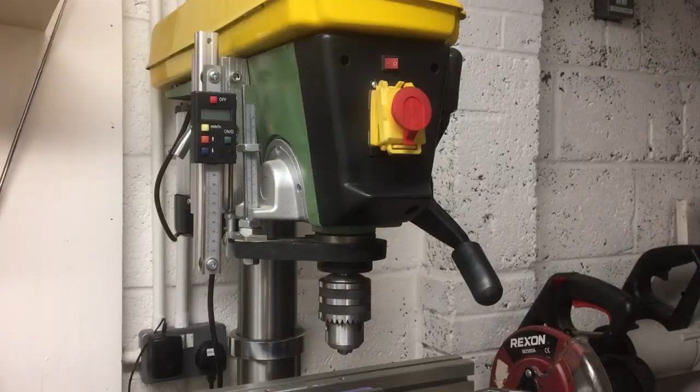Let me introduce you to my Warco drill press. It's got a 650 watt motor, Morse taper 2 spindle, and a travel on the quill of about 80mm. Under this cover we've got two belts configured with an idler to give a 16 speed range. And we've got the usual rack and pinion adjustment for the table height. So all in all, a very powerful, robust, sturdy drill, ideal for hobbyists.

But could it be improved?

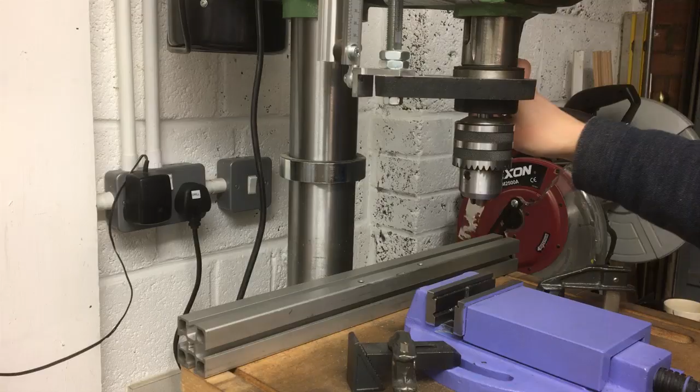Well, in common with all drill presses of this style, changing the belts can be a bit of a pain. In this particular model I've got to go up the ladders, undo the screw on the cover, then adjust all the belts, change the speed, tension it all back up again, and then I've got my new speed. And when I want to change the speed again, I've got to repeat it.

But could it be improved?

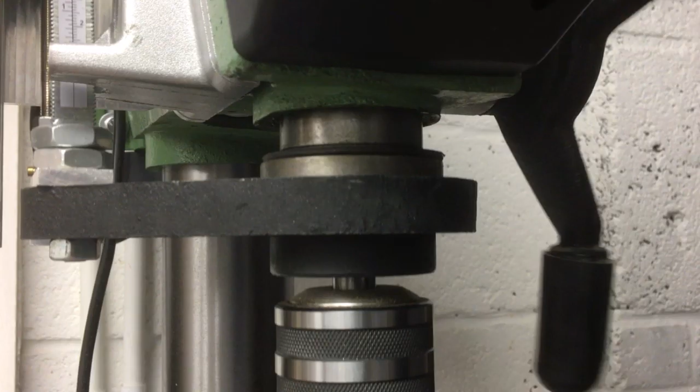Also, like all drill presses of this style, there's a little bit of free play in the quill. It can be tightened up with this little set screw that runs in the groove, but could it be improved?

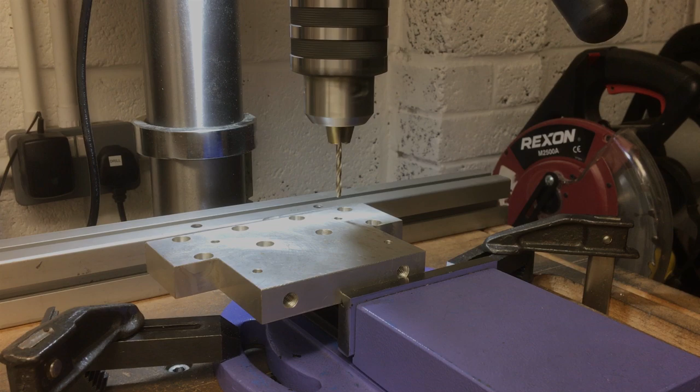When you move the table up and down, you lose your reference to your hole and you've got to get back on the centre again. Particularly apparent if you drill a pilot hole and then put a large clearance hole in, or if you want to drop it down even further to tap a hole.

But could it be improved? Let's find out.

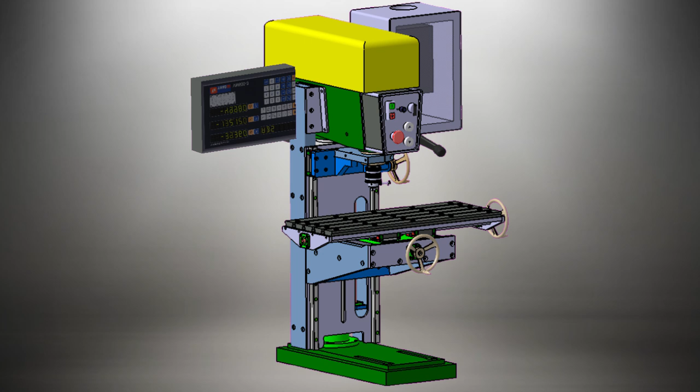Okay, so that's the basic idea. There'll be a steady system on here that will run on rails that holds the quill in place at the bottom end, and then essentially an XY table like you'd find on a knee mill.

Oh wow, so you're building a milling machine then? No, it's not a milling machine. But it's got a milling style table? Yeah, I know. It's not a milling machine though. This is going to be a drilling machine. So what that will enable me to do is drill very accurate hole patterns using the table, or bore holes, counter bores, and then there'll be a slow speed feature for tapping threads. So that's the idea, it's a precision drilling machine. You sure you can't mill with this machine? It's not a milling machine.

Well, for a start, you've got the wrong bearings in here. These bearings are just to take the axial load, not any radial loads that you get from milling. And the second thing is, when you're milling, because there's a helix there will be a tendency to pull whatever you've got in here, in this case the chuck, out of the taper because there's no drawbar holding it in. So it's a precision drilling machine, not a milling machine.

Although, if we took the spindle out, made a new spindle with a drawbar, automatic tool changer, and the right bearings... No, this is a precision drilling machine project. Let's just get that done and get it finished. But you could mill with it. Leave it.

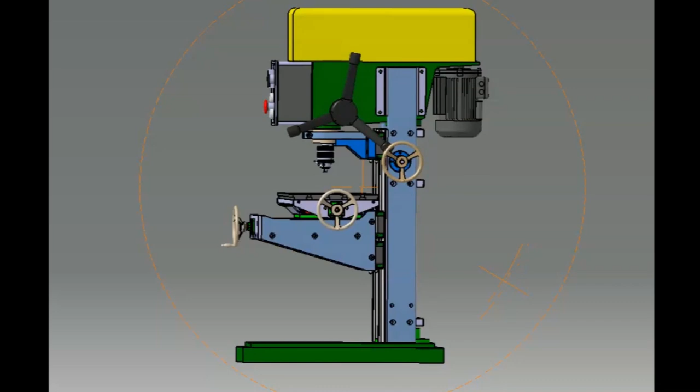Okay, so let's have a more detailed look at this machine. You can see an XY table towards the bottom there. It runs on those linear rails, and that's moved up and down by the gold crank handle on the right. Then we've got the quill itself, you're going to see move up and down, on those linear rails in the usual way. There's the black 3-pronged handle that moves that up and down. It's just supported at the back on those linear rails. I haven't drawn all the quills, so there's a little bit of a gap there, but hopefully it gives you the idea.

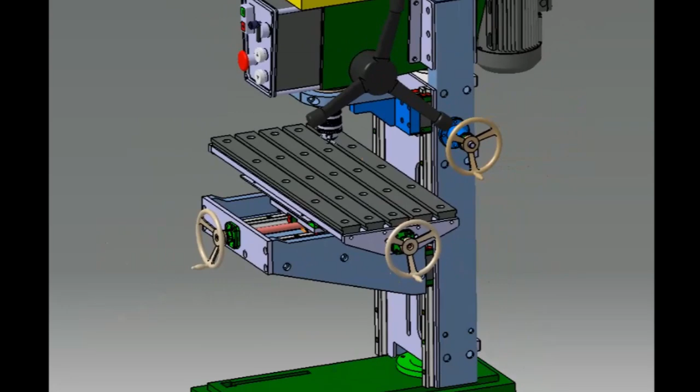Okay, we'll just zoom out a little bit and spin it around so you get a better view of the table. The table itself is a fairly traditional XY table. I haven't drawn the way covers on there, but you can see some of the shields and guards getting ready to take those bellows type covers. Otherwise it's fairly traditional. You've got two handles to move it in the X and Y direction. The other handle you can see on the top right on that tall beam is the handle to move it up and down. I'll show you that mechanism in a minute, but this is essentially the table moving up and down on those linear rails, a little bit like a knee on a traditional milling machine.

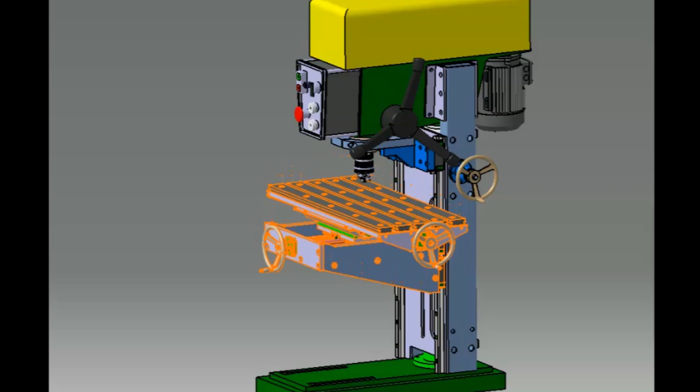And then if we spin it around to the back and zoom in so you can see the mechanism. That handle on the blue column, you can see there's a drive shaft that goes all the way through, and then the two purple parts are bevel gears. They're 45-degree bevels, so they take that rotary motion and turn it onto that ball screw, which is the salmon coloured part, and that turns the ball nut up and down. The ball nut's connected via a small arm onto that table.

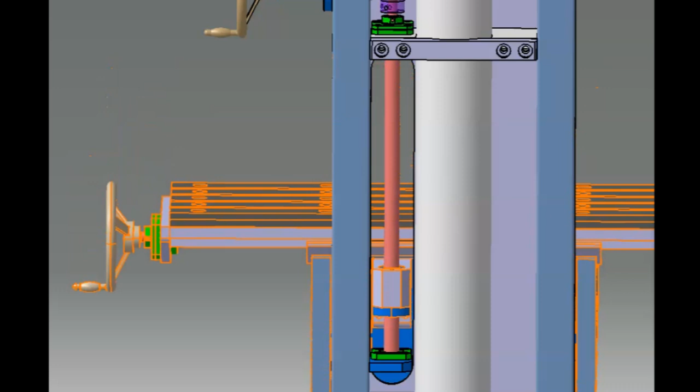A little bit like you would find on a normal or benchtop milling machine. That moves up and down like that in that slot.

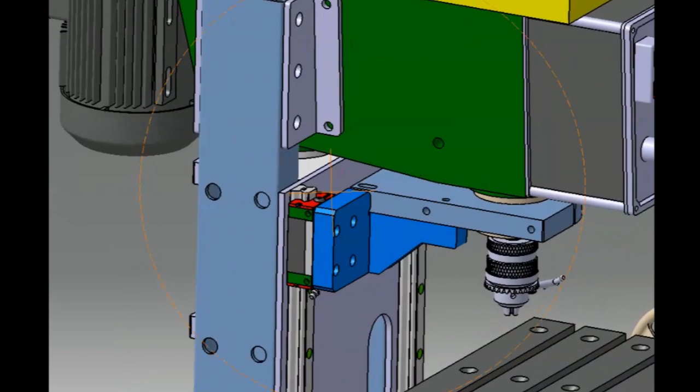Also, while we're around the back of the machine, you can see the main tube there, that white column, that's about an 80mm main column. Then there are 3 clamps that clamp these side rails onto that, kind of blue side rails that go onto that. And they then take a plate on the front, which will be a precision ground plate, and then that takes those linear rails, which are 20mm rails.

Now we're onto the front control panel, so I'll make this control panel from scratch. You can see there's an on-off button and the speed control, then forward and reverse, and bottom left is emergency stop, and then the 2 arrows for up and down jogging.

Here you see I've taken that front panel off, and you can see how I'm going to make it. There'll be 4 tubes, one at each corner, and each of those tubes will have a slot machined in it to take a panel.

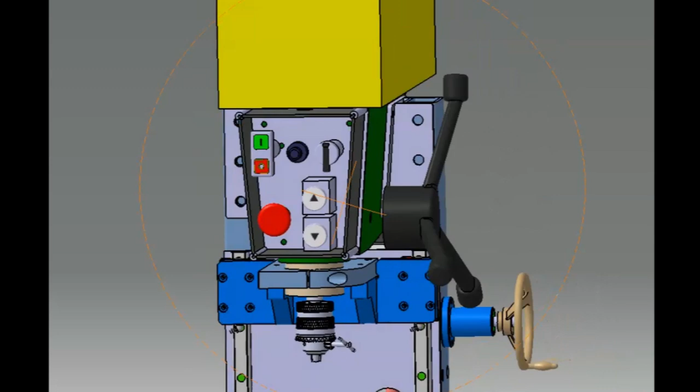And then in the panel at the rear that bolts onto the machine itself, there'll be grooves that those panels sit in, and the same thing on the reverse side of the outer panel. You'll probably see when we get around to making that part, but that'll just be made in sections and then slid together and bolted up tight.

Okay, so let's spin it around a little bit more so you can have a look underneath, at the table, the XY table, and then you can see the Z locking out mechanism.

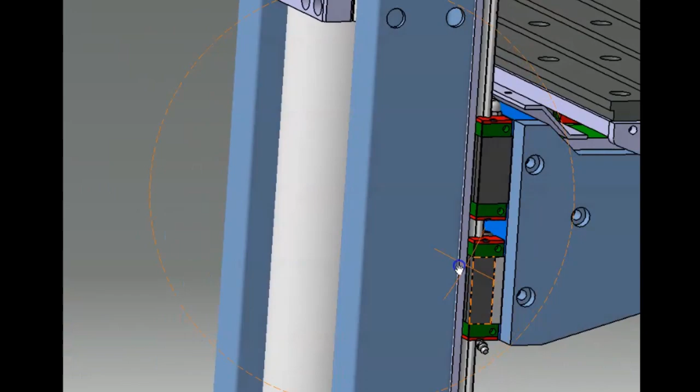That's the purple part, sometimes called a Bristol clamp, but it's an indexable clamp that you move the handle round and ratchet it round. That locks onto, because you don't want to put pressure on those linear rails directly, it locks up against a kind of T-nut, the green one there. You can see it slides in that slot, and it locks that cylinder in place, the white cylinder, so the blue part can't go down any further, but they're not directly connected, if that makes sense.

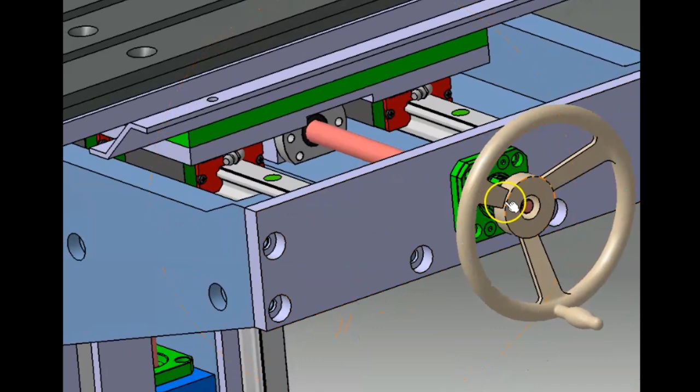Then you can see the XY table just makes use of standard HIWIN 20mm rails and carriages, and it moves in the X and Y directions. There's no covers on here, but you can see the drive handle there. I think that's where I'm going to lock it out, on the drive handle end, to stop it moving, sort of simulating a stepper locking it out.

There you can see where the way covers would go, I haven't drawn those yet. The bellows on that side, and then there'll be another set at the rear that will go from rearward, be folded up, and then go upwards towards the quill, a bit like you'd see on a regular milling machine, just to keep the worst of the swarf out from going down onto those rails.

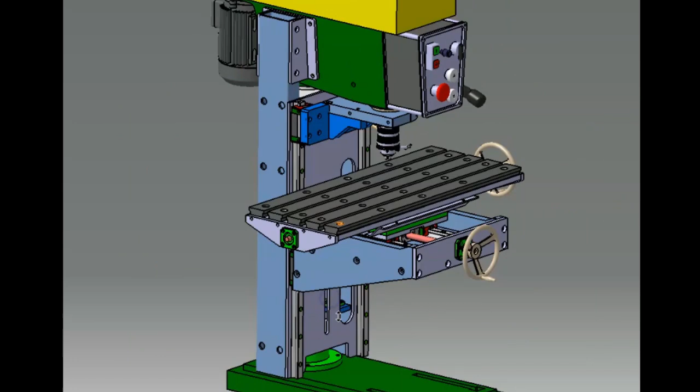So that will fill in that whole area there, and also cover for when the quill goes up and down. The last thing to mention is that we've got standard T-slots on the top there for bolting the vice down and fixtures and so on.

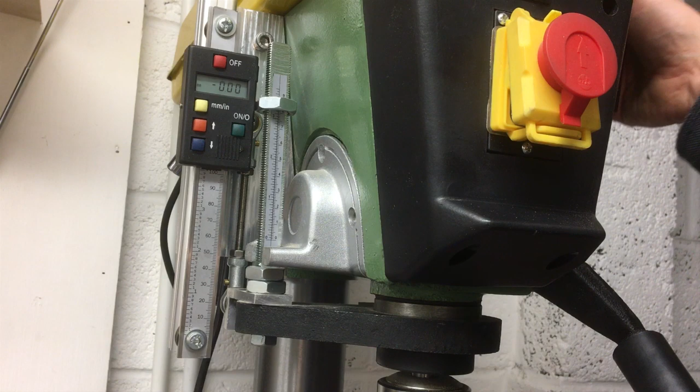So I've had this drill press quite a few years now. One of the first jobs I did when I got it was to add this digital readout on the quill. It's really handy if you just want to put a counter bore to a precise depth. It's a pretty fast update, works really well.

So all I did is made another bracket that runs off the back of this existing depth stop, goes to this multi-axis rose joint here, another one at the other end, and that pulls the read head up and down. By using those multi-axis joints top and bottom, it allows for a very slight bit of misalignment without putting pressure on the head.

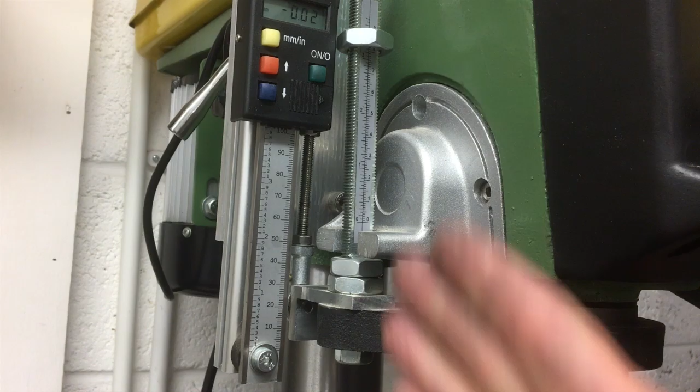I bought this from a company called Machine DRO based in the UK. They sell a lot of nice high quality gear. This has got a really nice smooth quick update and it works really well.

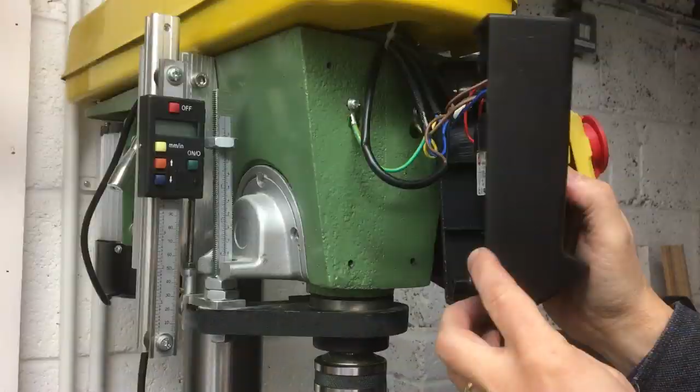Okay, so if we take the front control panel off, inside we've got a no volt release switch here. If the power fails, it turns this unit off, saving it from starting accidentally.

At the top we've got the rocker switch that controls the light. We've got a couple of ground points there, so there's 4 cables in total. One will be the mains coming in, one will be going off to the safety switch, because in the lid up here, if you open it to change the belts, it cuts the power.

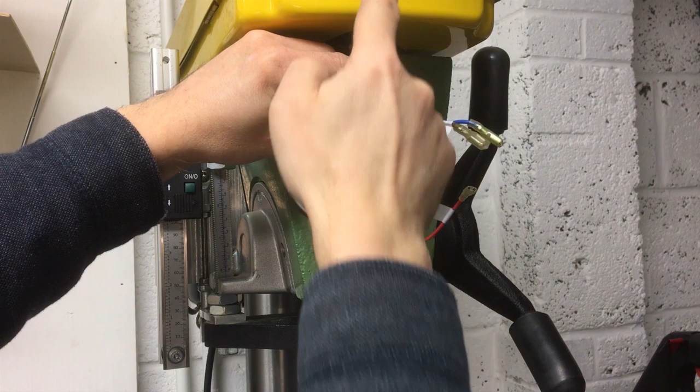Now we've got the cover off, I've labelled up all the cables here. So we've got 4 cables in total. This first one comes from the mains. This one is to the motor. This one here is for the light, you can see it's a smaller cable. And this one is the lockout switch. There's a safety interlock on the cover, so if you open it to change the belts, the motor won't run.

Looking at it a little more closely, we've got our main cable coming down there, onto the mains, onto this one, which is on pin 1. If we look at this little box, this is the back of the safety switch. So 1 comes in here. If you press the switch to run the motor, that joins it across to terminal 2, and 2 is up here.

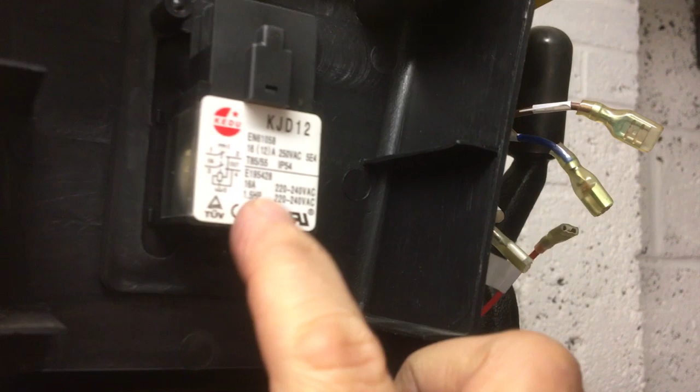2 is up here, and that goes to the lockout, the safety lockout on the cover. Assuming the cover is closed, that comes back on pin 4, down at the bottom here. So it's gone all the way around 1, jumped across there, gone up to the lockout, back into 4.

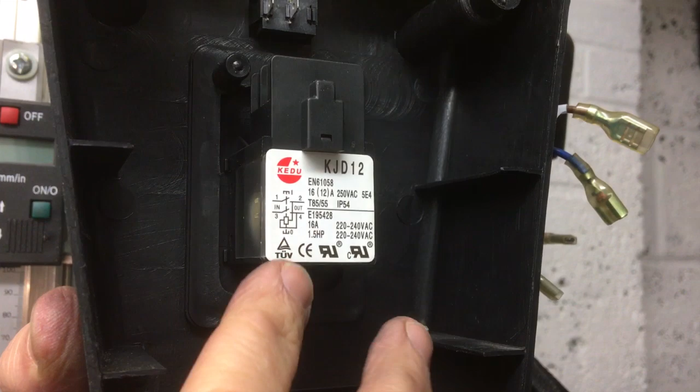That does 2 jobs. One, it energises the coil, and you might just be able to see there's a relay coil in there. That's the interlock system, so as long as there's power going to the system it will hold the switch in, and if the power cuts, it switches this off so it doesn't start inadvertently when the power goes back on.

The other function of pin 4 is when that's joined across there, it feeds power into pin 3, and pin 3 is here, and that goes off to the motor. This is just a single phase motor at the moment. Comes back from that motor down this cable and into the neutral and back into the mains.

Now there's 2 earth leads on there, one's from the mains and then there's another earth here, just making sure the basic chassis is earthed as well.

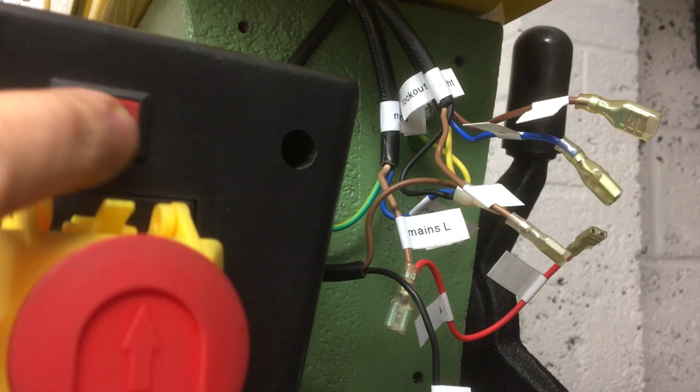So essentially that's it. The only other function is there's a feed off the live that comes here and goes up to the switch. When you switch that, this little switch at the top, it makes the connection from here to this one. You can see these are a lot smaller. That goes through this cable to the light, and then back from the light to this common neutral connection, back into the mains neutral, and that's it really.

Okay, so we'll be using almost none of that. In fact, we won't be using the mains because we're going to run that to the inverter. We won't be running the motor because that will run off the inverter. The lockout, if we use it at all, will go to a safety inhibit on the VFD control cabinet, so we won't be using that. The light switch, we won't use that because we'll wire that on from the inverter control unit. So the only thing I think we'll run from here is probably the earths.

So let's have a look at how we're going to power this drill press. We're going to use this inverter here. This was sent to me free of charge by Banggood to include in this video, and we'll have a look at it and see what we think.

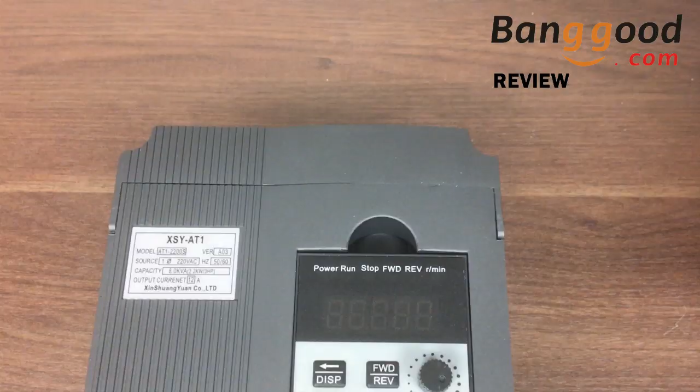This particular model is an XSY-AT1. It's good for 2.2 kilowatts and 12 amps of current. The reason I went for this particular model, well, a couple of reasons. One, it's extremely cheap, somewhere around 55 or 60 pounds. The Huanyang model I've got on my CNC machine was around 100, and a few years ago a name brand Siemens model I bought was about 350 pounds. So these are certainly extremely affordable, so let's see how we get on with it.

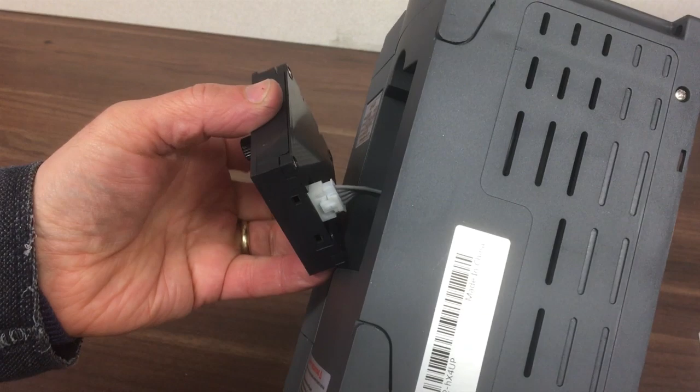So in terms of a very, very quick overview of what we get here, we've got the control panel on the front. This is removable, with the usual little ribbon cable at the back there. You can extend this and have the panel mounted somewhere else on the front of your control box. And then at the bottom here we've got an access panel. This is where the main wiring goes in.

So we've got the knockout panel there to put the wires through, to give it a little bit of protection. And then down the bottom there, you can see left to right: first one is the earth, then we've got neutral and live, and the last three are for the motor, UVW, that's where the three-phase motor goes.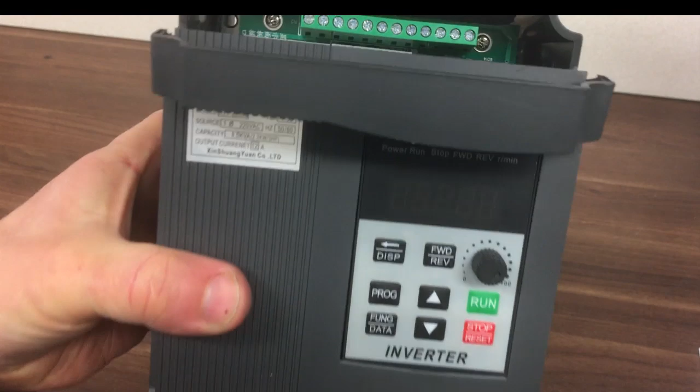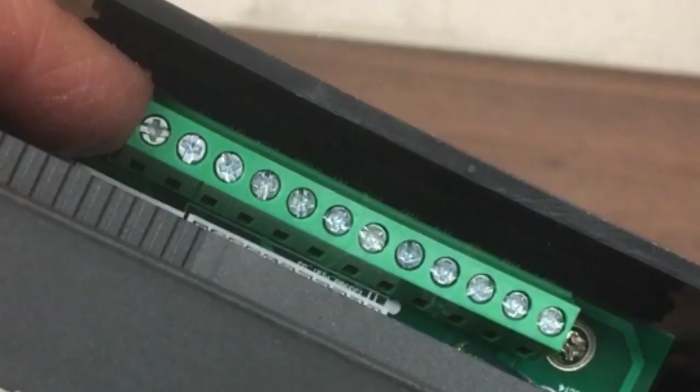So that's what you've got at this end, and then at the other end, this is where all your signalling's done and the controls for external controls, inputs and outputs. On this particular model it's really hard, you might just about be able to see the labels on each one. I've just soldered this header on slightly off to one side, you can almost see just there. I'll probably have to make a note of those somewhere else so I know what they are. Might help if I pull this gasket out a little bit. That's what you got at the top end, and that's what we've got at the base.

And then on the rear of the unit, we've got the usual little small fan that blows over the heatsink to keep the thing cool. These can be a little noisy, so we'll see if we end up using that or have an auxiliary or something like that. And what else can we see?

If you look inside the unit, we can see the big capacitors there. Looks like it's a transformer, probably for dropping down to the low voltage. And then, not easy to see, just through there you can see on the back of the heatsink the IGBTs. No, not easy to see. That's the part, they're the switches that you want to keep cool.

Okay, so that's a very quick overview. We'll go into detail a little bit later, but so we've got our mains power coming in there, motor there, all our inputs and output signals if we need to use those for any remote controlling, and then we just need to make sure we mount it so that we've got enough airflow across there, and that's kind of it. That's our basic introduction. So that's the inverter.

Now Banggood also sent, again we'll show these now but we'll go into them in more detail probably in the next video, a load of components for the control box. So we have cooling fans.

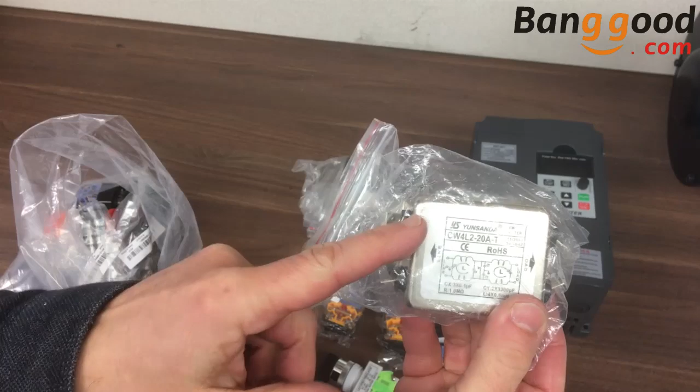Our 3-position switch, potentiometer for the speed control, and a filter there, so we'll put a line filter in front of this because these are electrically very noisy. That will go in.

Emergency stop. This is our on-off switch, a momentary on-off switch, so it just briefly makes contact as long as you hold that down. And the reason I went for that is because we're going to have a latching relay for the emergency stop safety system. So that's the power.

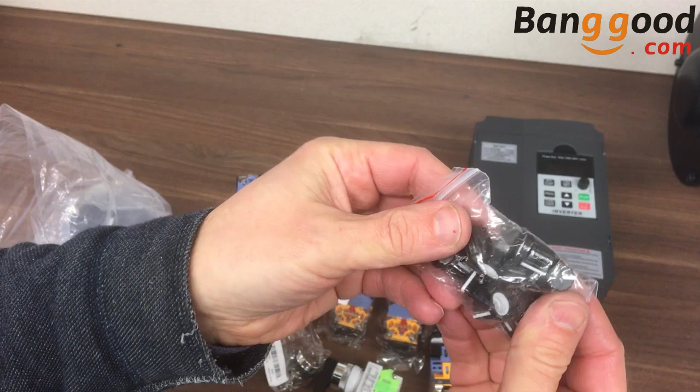A couple of these 12-way connector blocks just to make life a little bit easier for some of the wiring. You can't buy these individually, so we've got a pack of 10 for next to no money. These are the volume or speed control, and that will be the speed control knob that goes onto the potentiometer.

And I was getting a bit low on the heat shrink. I like using heat shrink to make a neat job, so they sent me a pack of that as well. Alright, so all these will be part of the control box, we'll show that probably in the next video. So what we need to move on to next is what we're going to connect this up to.

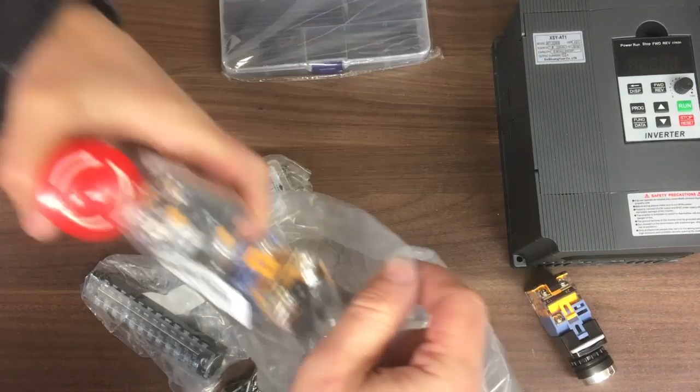So the next thing we need to look at is the motor, the 3-phase motor. And in the end, I went for this one. It's quite heavy, so this is a 1.1 kilowatt motor, which is why I went for the slightly larger inverter. Because of that, it's a 90 frame motor. The frame on my drill press, the 650 watt, is an 80 frame. And what that basically means is that the spacing between these feet is larger on this.

The input shaft, or the output shaft over here, is larger, as is the keyway, as is the distance between this and the front face.

Basically, it won't fit on my drill press as is, so I need to make an adapter.

So the reason I went for this, which is almost twice the power of my current drill press, was I wanted plenty of torque at low speed. I wanted to definitely be able to do some tapping, and just in case we ever turn this into a milling machine, a 1.1 kilowatt motor will come in very handy.

I knew it! You're making a milling machine, aren't you?

Okay, so the other features of this motor are, this is a 90S frame motor, so it's slightly larger than the 80 frame. What that means is instead of the 19mm shaft, you get a 24mm shaft on here. It's a little bit further between this point and the front face, but that means the pulley we've currently got on the drill press won't fit.

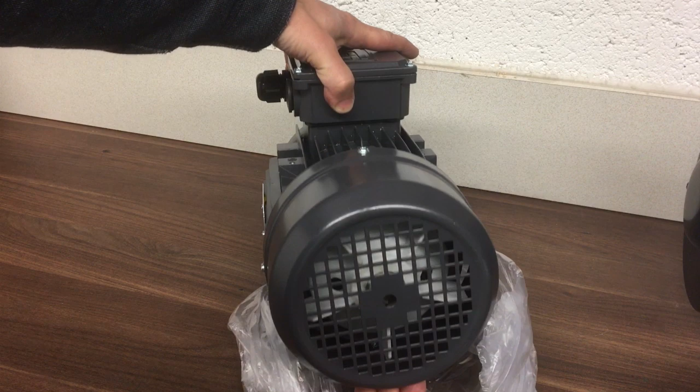Now if you look around the back here, this is a TEFC, so a fully enclosed fan that's just on the back of the shaft, the non-driven end, and just blows air constantly over that motor and keeps it cool. That's one of the things to watch out for.

So if you're running these below the nominal - this is 50 Hertz we're going to run this at - if you're running them below the 50 Hertz, then of course this fan's going to run slower and slower, and it will be a kind of exponential drop off. So if you're not careful, it'll quickly overheat, so you need to do something about that.

So there's a couple of options available. We'll get into that a bit later.

I'll just talk a little bit about how these work, just as an overview in principle. They are quite amazing really, and it's amazing to think what you're getting for your money.

So what we're essentially doing is converting, in our case, single phase AC through this unit, and turning it into three separate phases that we can use to control the speed of this three-phase motor. There's quite a few little steps involved in between, just a very brief overview of how it's doing that, because some of that might be useful when we go to see the parameters - we can refer back to this and get an idea about some of those features and what it actually means.

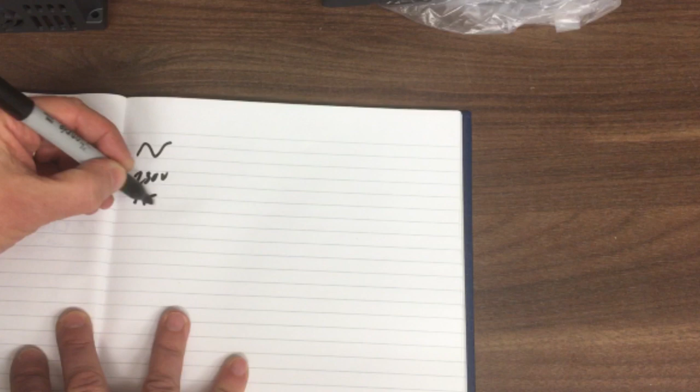So we start off with the main supply going in - in the UK that's 230 volts AC - that goes into the inverter, and inside there we've got the full bridge rectifiers, so we're rectifying that signal, so now it looks crudely something like that. There's our rectifiers, and then that gets smoothed by the capacitors, so now we're looking something like that, a little bit of ripple on it. So that's our capacitor bank there.

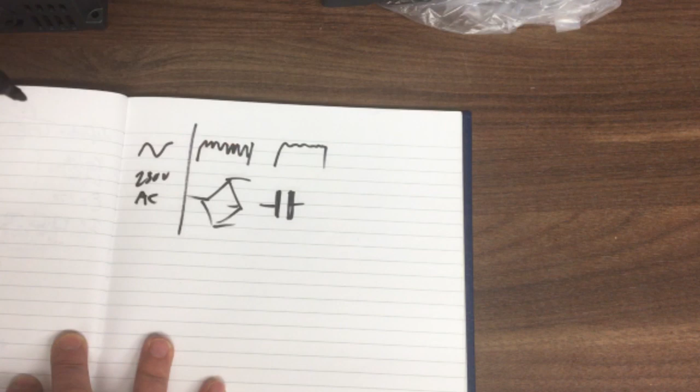And then that goes into the IGBTs, so now we're DC, firing that into the IGBT. So they are solid state switches - we referred to those a little while ago when we were showing the cooling at the back there. So those are the things we need to keep cool. They go through a range of these - I won't draw it actually how it is, but they're just banks of these switches like that. And effectively what you're then doing is, they output from there, and they then go into the motor.

So let's just draw our three-phase motor here and run the motor. And what these are actually outputting is, well, let's just draw them as representations - sine waves like this. So there's one of the phases. Second one shifted by 120, badly drawn. Another one shifted by 120. So that's 120 and plus another 120, notionally shifted like that, and that's what goes into the three-phase motor, into the windings and the different poles, and spins the motor around.

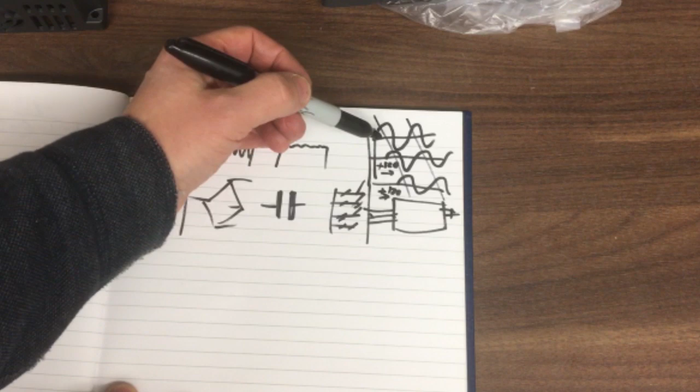But actually you're probably thinking, well, how do these switches actually make sine waves? The answer is they don't. It's PWM. So if we just break out of here a moment, instead of it being like that, let's think about our sine wave - we'll draw it best we can freehand - and what they're actually doing is something called PWM, pulse width modulation.

So if we take a time reference, that's okay, just very rough. So we'll take that, and what we end up doing is breaking this signal down into how high that level is as an analog level.

So here it's 0, so nothing happening, and we get to this point here, it's kind of halfway. So in that frame nothing's happening, and this frame is kind of on for quite a lot of the time. When we get to the top here, in this frame it's on all the time.

Oops, it's not higher, because don't forget these are PWM signals that are the same voltage. Then we go down the other side and it's on for half the time. Keep want to draw it half the level. And we get all the way down to here where it's hardly on at all, so a little spike like that, and then 0.

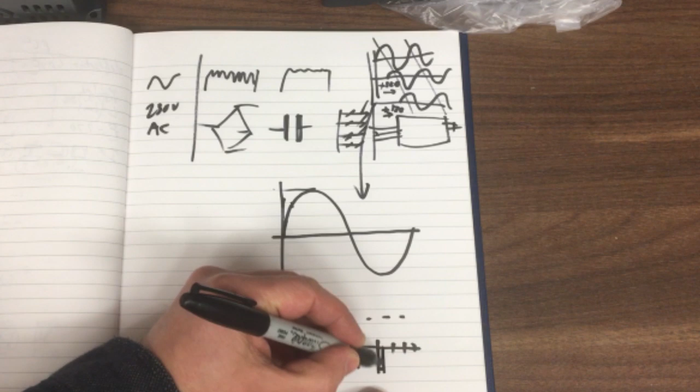Then we go the other side and it goes the other way. So we've got a little bit like that, on briefly and then off, and then on for a bit longer, then off, then on all the time. Badly drawn, but hopefully you get the idea, and so on. And those are a fixed level as well.

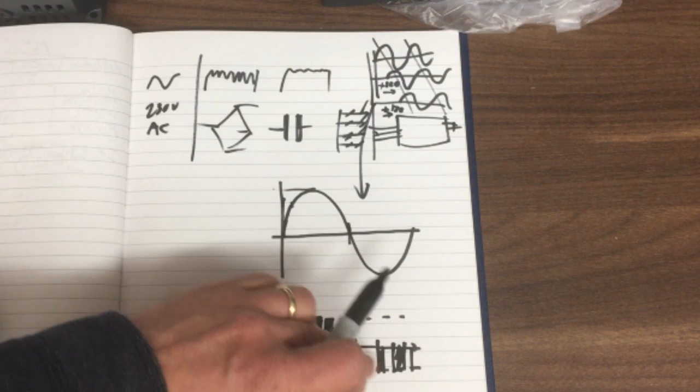So we're turning this motor on and off rapidly and for longer and longer periods of time in any given time interval, such that it's fully on when it's here, and then it's fully off when you get to this point here, and then the negative can go the other side. So this is PWM, and that is what's going into the motor into each of these 3 phases.

Now normally when you run something on a square wave like that, it's horribly noisy because this sudden jump in voltage here puts a massive pulse into the system and can make nasty noises. So servos and stepper motors, if you run them at a very low step rate, can be quite poor.

But we get away with it in this case because this induction motor effectively smooths out a lot of this, and it actually runs very smoothly. In fact, induction motors are noted for running relatively smoothly. So that's an overview of what we've kind of got there.

And it's worth just talking about that because this little interval of time that we've got each of these pulses over is one of the parameters we need to refer to in here when we go into some of the parameters in depth with a little bit of tuning. So we'll come back to that in a minute.

That's our delta T, or our carrier frequency. We'll come back to that in a minute.

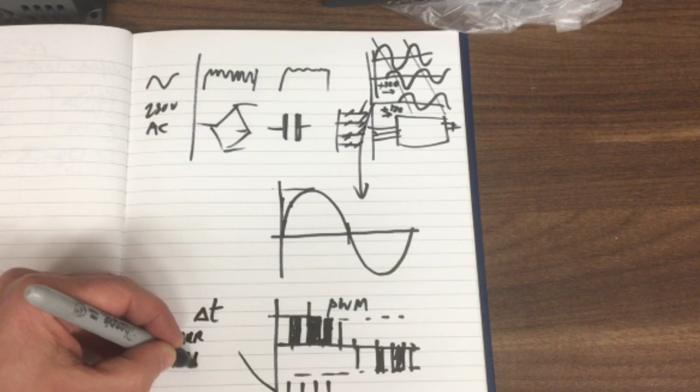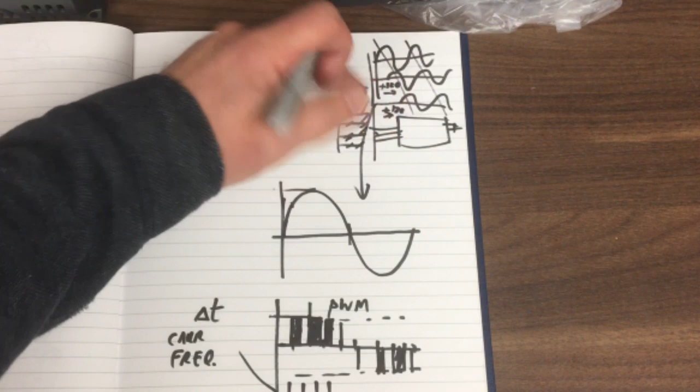But that's a step by step what's actually happening. So we've got our AC mains coming in here, rectified through the full bridge rectifier, then it gets smoothed out, then we're onto the DC bus, and these get switched on and off rapidly by the IGBTs, which are in here. And we create our pseudo sine waves with the 120 degrees phase difference between each of the 3 phases, and that runs the motor.

But we're actually running it via PWM control. That's a very quick overview of what's going on. Can't leave it like that. Okay, I'll just quickly draw these in.

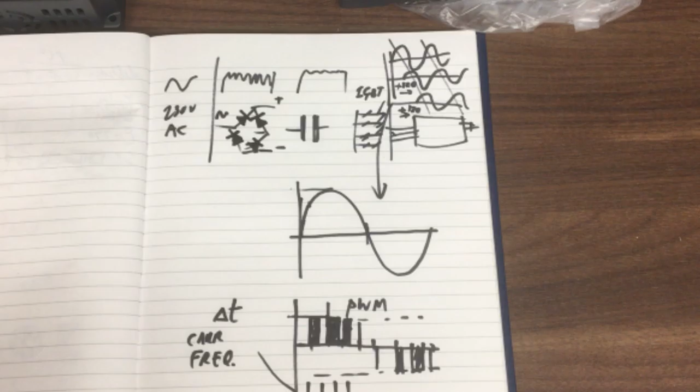Yeah, it's better. The first thing we need to do is wire this up, just make sure it will turn on before we go any further.

Just helps a little bit if you magnetize them. And the last one is the earth. So this is just temporary while we make sure it works.

Alright, so we've got live is brown in the UK, then neutral is blue, earth, green and yellow. That's fine. I'll just make sure these are tight. I don't know why, just don't like them being loose.

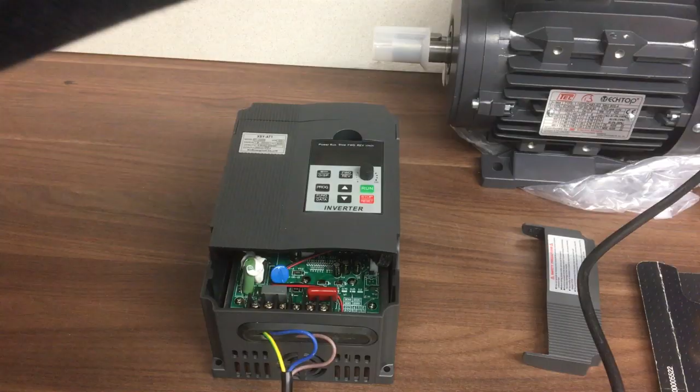Right, there we go. Okay, now we'll plug it in and let's see what happens. Hopefully it'll be a few seconds delay while the capacitor charges up and then it will come on.

Actually, a year or 2 back I did have one of these. It was a Huanyang one, not this make, and I did just this. Just live and neutral and earth. You can't really go wrong.

Plugged it in, switched it on, a second or 2 later, massive blue flash, bang, and the whole thing was dead. And I got into a bit of a debate with the eBay seller about, well, I even sent in the photos, I haven't even connected the motor yet, I've just wired it up and it's gone bang. And in the end I did get my money back and I went for another one.

Right, here we go. Hopefully that won't happen. So we'll turn it on. This is genuinely the first time I've done this as well. Let's see what happens.

Okay, no blue flashes, no sparks. I did think the fan might come on, but on this model the fan might only come on when we're actually in run mode. That's not so bad. It could even have a thermocouple on it, but if it only runs when it's actually powering the motor, that's great, because if we're filming and it's just idle, we don't need to worry about that.

Right, that's a good start. Next, let's get the motor wired up. So we'll switch this off and wire up the motor next. Let's have a closer look at the motor plate on the side there.

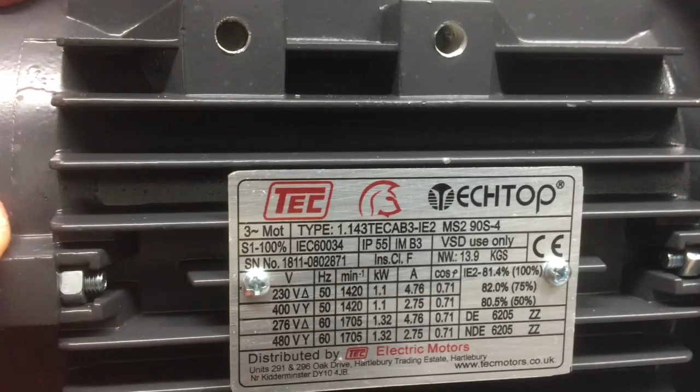As you can see on there, it'll run at either 50 Hz or 60 Hz, so we've got 50 Hz in the UK. This is a 4-pole motor, so it'll run at about 1420 RPM or a little under, allowing for slip. It's 1.1 kilowatts, and with that configuration it'll run at nearly 5 amps, 4.7 amps. Since we're 230 volts in the UK, we'll run it at 230 volts using the delta configuration. It also has the option of the Y configuration if you're running it at 400 volts, which gives lower current for the same power output.

There's a few other things on there we don't need to worry about too much, but you've got the IP rating - the waterproofing rating of 55 is pretty good - and the insulation class for the windings, F, which is pretty high. So it's quite a nice little unit. It's nearly 14 kilos, so it's pretty heavy. That's a quick overview of the 3-phase motor we've got.

In fact, it's actually repeated on the lid as well. So we're going to be doing the delta on the left there for the 230 volts.

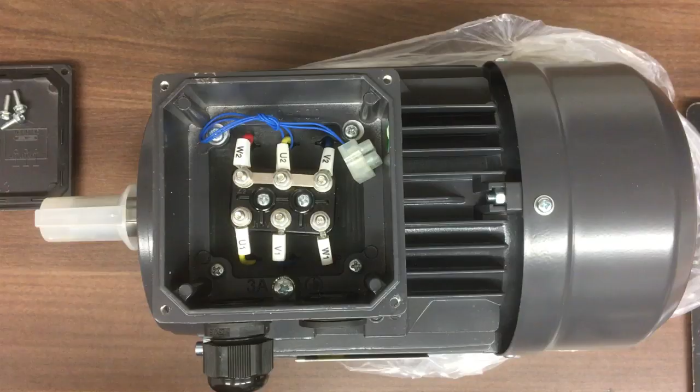Now looking inside, you can see the windings of the motor that go into here, and we're going to put our motor power supply into here and connect onto those. So we just need to configure this. I didn't ask for it, but the other thing we got in here is a little block, which is likely for an auxiliary device like a thermistor or something like that.

And here's our links. We've got our links across, so let's see how many we've got. Oh, go on then, click.

Before we go too much further, just thinking about the orientation of this on the machine and where I want the electrical outlet relative to the feet. I'm going to swap things around a bit - I think we need to move the motor plate around to the other side and put the feet here, and maybe turn this 90 degrees. But let's get this off first.

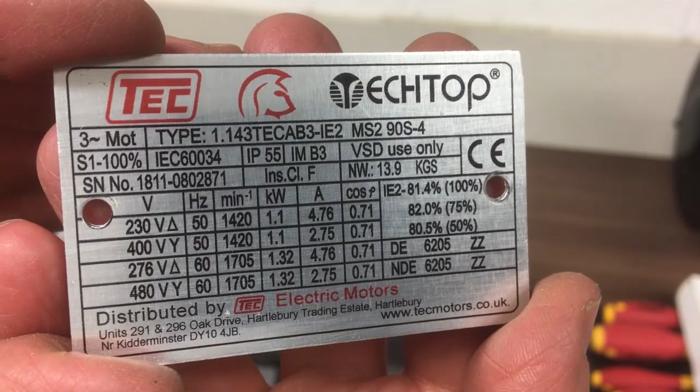There's a close-up of the motor plate. I'll say, so far I'm really impressed with this TEC company - Total Engineering Commitment. Well, you can't argue with that, can you?

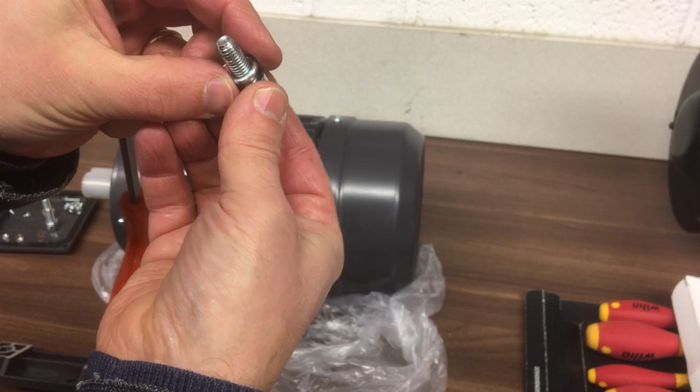So it's just held on with these cap head bolts here, look like M8. Quite tight. Okay, let's note which way around they go - a single hole to the front and on the outside. I guess I could always look back at the video. Let's see if they got any thread lock on. No, they were just tight.

On the feet here now, that way. So with the feet mounted at the bottom, that's going to be up on the machine, the wall will be behind here, and down is sort of that way. So it would be nicer if the cables come out the bottom there and loop round into the inverter that way. Here, for a start, it's going to make it awkward to put that bolt in. So we'll take this top off, index it round, and have the harness or cable run coming out the bottom there.

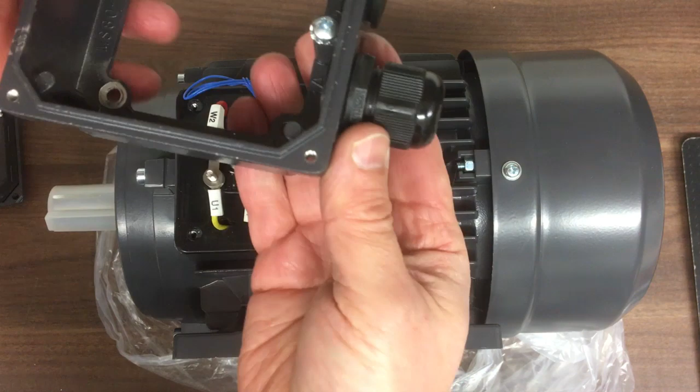Alright, now just being careful not to move that or catch it, to show what we've got under there. So, got a nice gasket to keep the worst of the water and chips and stuff out. And then here's our housing - you can see we haven't punctured the gland yet. And there's an auxiliary there, so if you're running a heater or a thermistor or whatever, that can come in there. Right, so that needs to go around there.

So I got hold of this spindle cable - this is the one off my CNC machine, used to run the water-cooled spindle, the 1.5 kilowatt water-cooled spindle. And like all of these glands, they've got a rubber cup at the end, so as you do this up, it's tapered and it holds onto the cable.

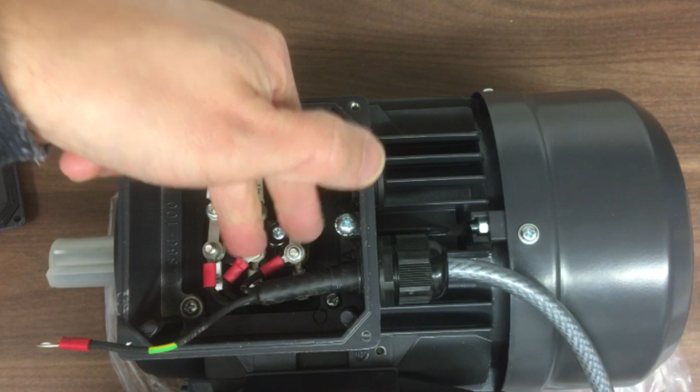If you need to reverse the rotation of these three-phase motors, just swap any pair of cables. You can swap these two over, these two, or these two, whichever you prefer. Or it's probably a little bit easier to do at the inverter end—you've got the three at the inverter, just swap any pair over and it will reverse the rotation.

The last connection to make is the earth. They provide you with this little earthing point inside here. There's also one on the motor—just about see it in shot, yeah, there's one down there as well—if you wanted to earth it that way, but I think it's more convenient to earth it inside the control box.

We've wired up the three phases, and we're doing it in the delta configuration for 230 volts. We've also got the earth connected, so that's all good. This is a shielded cable, by the way, because there's a lot of electromagnetic noise off these motors, and we'll ground that in the control box at the star earth.

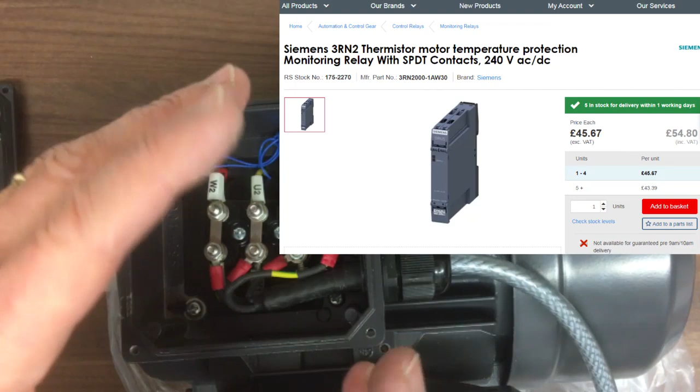The other thing you'll notice in here, I think I mentioned it earlier, there's a temperature sensor, and this varies its resistance depending on temperature—so the hotter it gets inside the motor windings, the higher the resistance. You can hook them up through this connector here to a special kind of relay designed for these that goes in the control box.

When that temperature gets too high, about 150 to 160 degrees, it will trip, and then you have to arrange it so that that little relay system connects to your emergency stop on the inverter via one of the digital channels. So it's probably the neatest way to do it, and it's probably worth explaining that a little bit further.

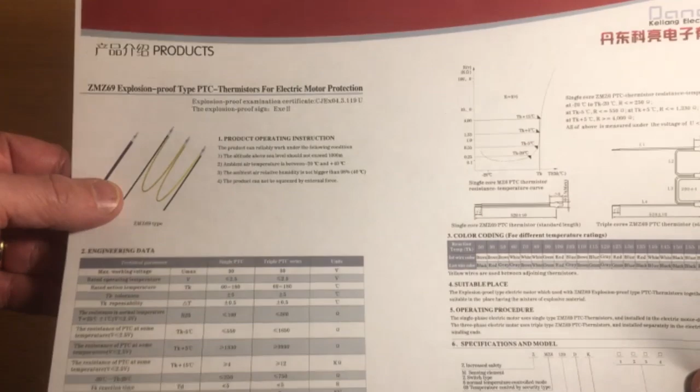There was no data sheet for the PTC, the thermistor used inside the motor, so I phoned the motor supplier and asked if they could send one—they emailed it over. This is the spec sheet for the sensor itself. They use these PTC, positive temperature coefficient, thermistors to measure temperature, and there's basically two types: one for a single phase motor, or in our case a three phase, so we've got one for each of the phases. The way these work is with the triple PTC series.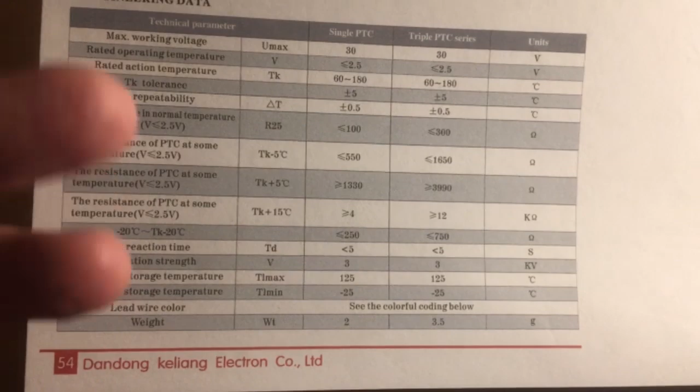In the workshop at the moment it's around 12 degrees C, pretty cold, and I measured about 200 ohms across the terminals. So we're clearly working in this range here—this is for 25 degrees, but it's not really that in the workshop at the moment, so we're somewhere in that range.

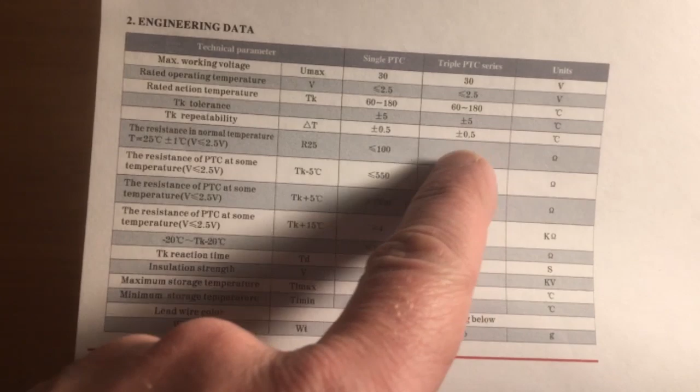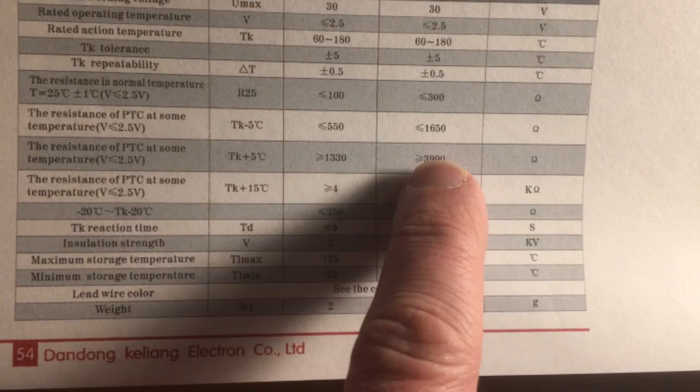There are three trip points of interest: one is 5 degrees below the trip point, one's 5 degrees above, and one's 15 degrees above. The resistance goes from a relatively low value, 1650 ohms, just as you go into the trip point. When you get to that trip point, or just over it at 5 degrees over, it shoots up to 3990 ohms, and at just 15 degrees over it's 12 kilo ohms.

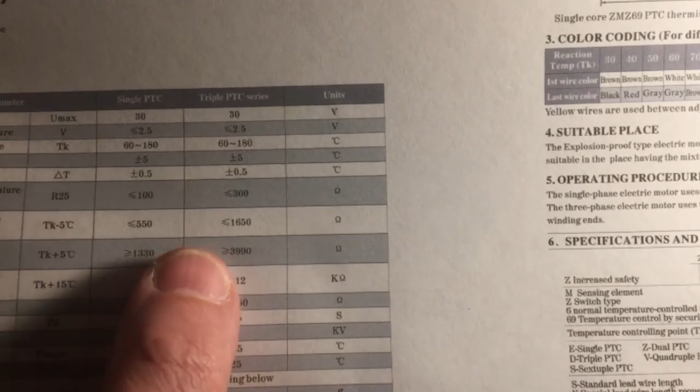The way they code for that is by looking at the wires on the terminal—they were blue, blue. If you check what blue, blue means, we get to here: it means this particular PTC gives this rapid rise in resistance at 130 degrees. They've all got the same shape, the same resistance trip characteristic, exactly the same resistance—it's just that they do it at different temperatures depending on the rating of the motor. So we're running at 130 degrees, blue, blue.

So this curve for us will happen at 130 degrees, and the resistance will suddenly shoot up from 1650 to 3990.

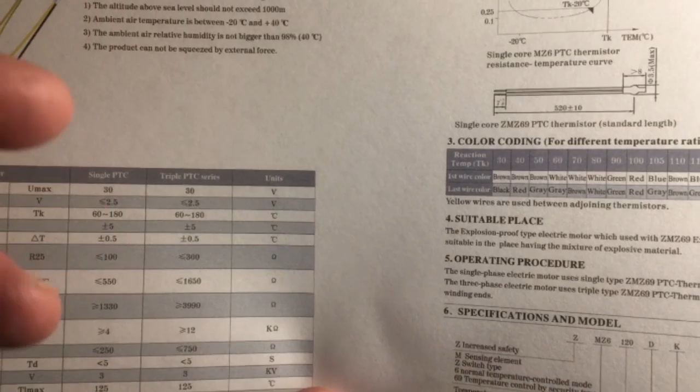So in principle you can connect it to any of those relays and they'll all detect this change around 3.5 kilo ohms, and that's when they'll trip something out via one of the normally open or normally closed contacts, depending on what facilities they've got, and some might even self-reset. That's the data sheet that came with the three-phase motor, if you're interested. I'll hold it there so you can have a copy, just for your interest.

So we've got the motor end done. Let's bring in the inverter.

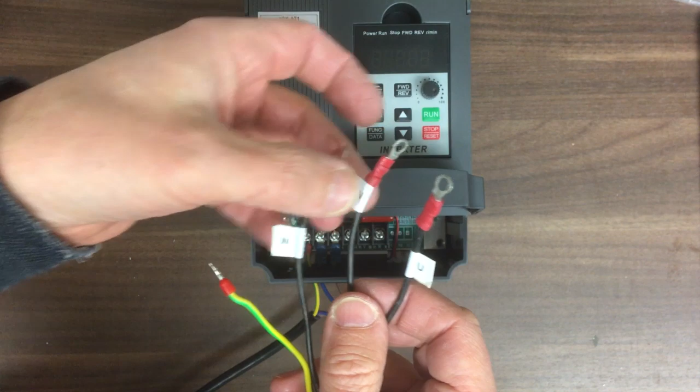So now we just need to connect up the UVW, the three phases, and these are already labelled because I labelled them last time when I used them on my CNC spindle. As I said a moment ago, these may not be correct and I may need to swap these around to get the rotation correct.

If so, I'll redo the labels. We will connect up the earth to this pin down here, or this terminal here. But ultimately when it's in the control cabinet, everything will come down to a star earth, probably about here, where all the earths come together. But just for running now, we'll do that. And then the shielding, we'll earth that to that same star point as well.

That's an interesting point on these. I think as hobbyists we generally do this pigtail style and we'll come off like that. It will obviously be covered, but we will terminate this kind of shielding like that and put it to an earth. My personal experience is that works perfectly fine.

But if you look at all the name brand inverter manuals, they'll tell you absolutely not to do this, and that you're supposed to get a kind of clamp that goes all the way around 360 degrees with metal teeth, and it picks up on this shield, and then it keeps that earth going into the metal of the control box and to the earth ground plane that way. I assume that's to do with the way that the very high frequency, skin effect maybe, of the radio waves or high frequency signals going backwards and forwards here, maybe the way they're supposed to spread out rather than going into this.

This is probably a poor connection for very, very high frequency, but I don't know, I'm not an EMC expert by any means. This seems to work, so I'm going to use it again. If I have any issues, I'll look into seeing if I can get the actual proper connector on here.

Okay, let's get started on it. It's just a simple type. This won't be the final installation. So there we go.

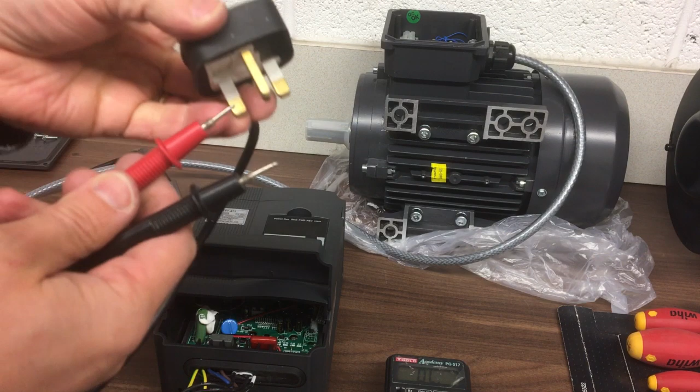So we've got the earth pin here, which is the largest one. No surprise, that's okay. So that's coming in okay, and then out to the motor body. Yeah, it's there. Oh, didn't get across the paint. Okay, so got there. Yeah, okay, the shaft. Okay, so that's looking pretty good.

There's nothing left to do other than plug it in, see if it fires up. Okay, 3, 2, 1. No bangs, good.

Okay, and the final thing to do is to configure the parameters in here so that you can talk to this motor and it knows what it's looking at. So we need to know things like number of poles, minimum maximum frequency, minimum maximum voltage, the speed range we want to run at. We need to know where we're going to run our start and stop from, the control. Also things like vector control for torque control and things like that. And I think about 127 parameters in total, and we're going to deep dive all of them.

So we're going to do all that on the next video. Hopefully you enjoyed following along so far, and I think this is quite an interesting project. Next video we'll look at the parameters. We'll also take a look at the control box that goes on the front of the drill press itself. Right, see you on the next video.